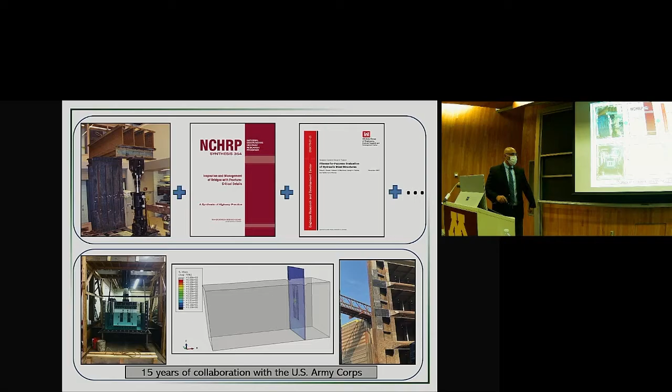Today, I'm not going to talk about fatigue and fracture, because that's one area that I work heavily on, and I've learned from Robert Dexter, but I'm going to talk to you about fire and fire-following earthquakes.

So here's the outline of the presentation. First, we'll talk about some motivations, and then I'll tell you some of the work we've done on system-level analysis and component-level analysis that kind of promoted the performance-based design approach that we looked into. And then how we might take this to a community-level analysis, if we want to look at community-level behavior. We've done it at the community level for wildfire, but the translation to fire following earthquake at the community level is quite clear. Then we'll have maybe some conclusions.

So the motivation is there are a lot of fires that have taken place in the US, and this report was released in 2020 that shows tremendous social losses. Casualties are very high, and a very, very high number of dollar signs on these direct losses. And you can see that the WUI, which is a big deal, and you hear quite a bit about WUI fires or wildfires, is only 19% of that. So fire at the building level is very important. Of course, at the community level it's obviously critical for certain states.

The problem right now is that traditional building standards specify a fire resistance rating. So they say you put insulation on your beams and members, and then maybe that will last for a couple hours, and that allows you enough time to either extinguish the fire or to leave the building. The design provisions, on the other hand, are very simplistic. They improved, but they're very simplistic. They're not intended to be at the system level. It's not a criticism of the current fire provisions, but they're not meant to do that.

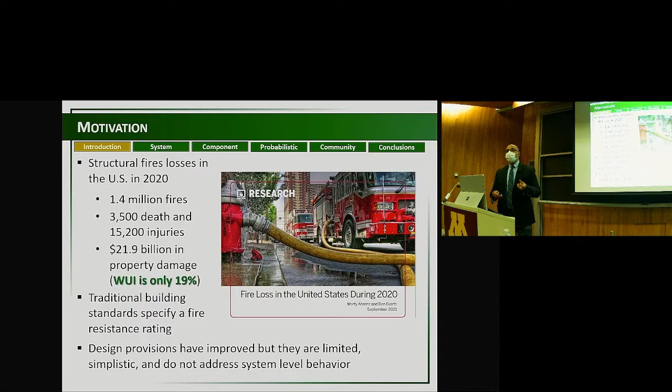So a lot of work needs to be done to understand the behavior of buildings under fire following earthquake. There has been large developments in Europe, but we need to do a lot more in the US.

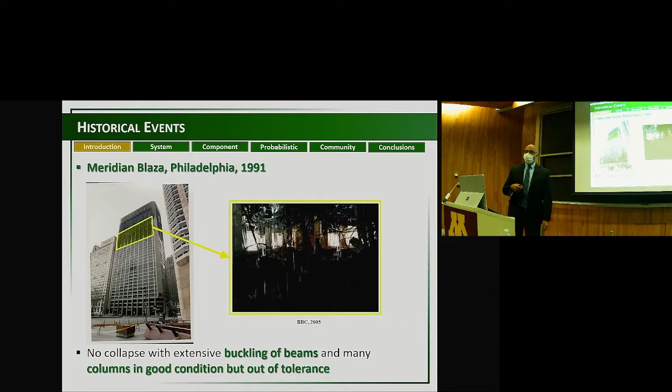If you look now at historical events, you'll see, for example, the Meridian Plaza in 1991. There has been tremendous damage because of a fire that ultimately caused no collapse, but there's large buckling of beams as well as large damage in general, but columns were in good shape. But if you look at cases where collapse did happen, and in this case it's partial collapse, you'll see that there was collapse triggered by buckling of the column, as you might expect. So column behavior is really important.

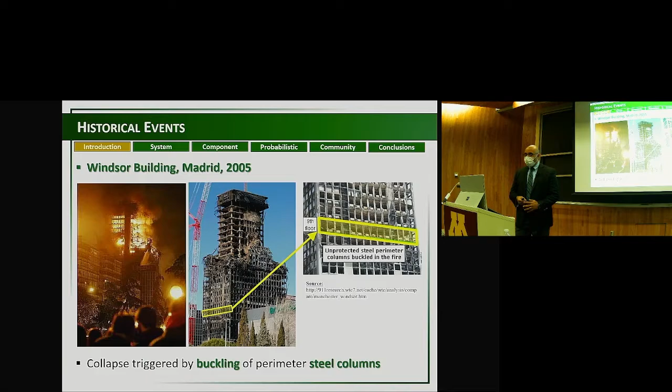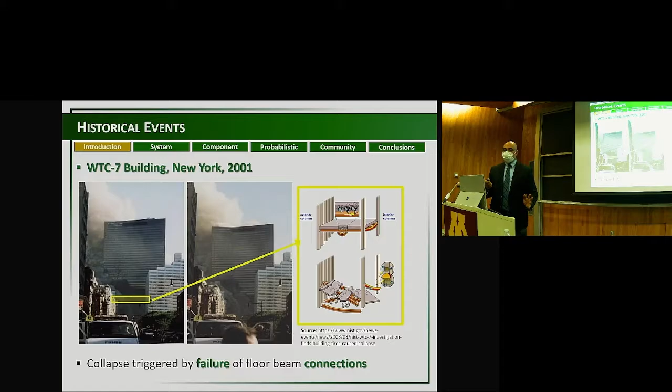That's not to mention connection behavior is not important, because what happened in World Trade Center 7 in 2001 after the terrorist attack is that we ended up losing one of the connections, the effective length of the column increased, and the column became more susceptible to buckling. But there have been some very limited studies that said the performance of buildings, steel buildings, under fire does not have to be as drastic as we might think. We might end up with large losses, but not necessarily collapse. And this test was done in the UK in 1991, I believe.

And you can see from the test there's tremendous catenary actions that allow you to distribute the load and take advantage of that tension.

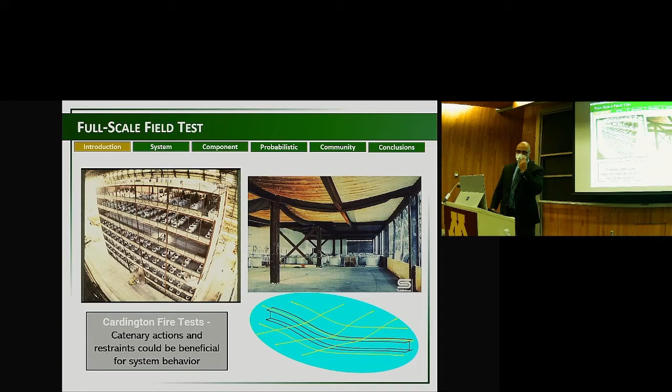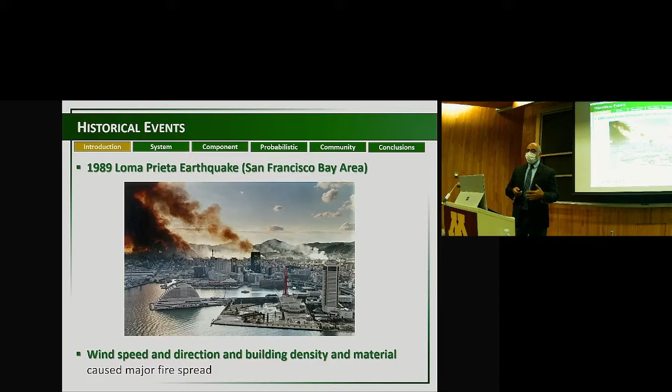And the fire spread because of the wind speed and direction and building density and material and so on. If you look at wildfire, there's very similar characteristics, not necessarily in the initiation of the fire, but in terms of the fire propagation. Fire will jump from one building to another because of the wind and the material and the direction of the wind and the wind speed and so on.

I had a project with NSF to look at the Camp Fire after the 2018 event, and it was just like a war zone. I can't even describe it.

So what is it that we're trying to get out of these sort of models that we want to develop to understand how to handle this problem? This is one way to think about it, not necessarily the only way.

So my way of thinking about it is we need to ask what is the time that we can have to escape. Because if there are people in the building, or even firefighters that go inside a building, it's very important to understand what the safety of the firefighters would look like and how safely can they evacuate people from an actual building.

At the community level, it's very similar because evacuation at the community level becomes very important, and you need to understand how much time you have and what resources can allow you to extinguish the fire and get out of the community as soon as possible. So it's a time-dependent problem.

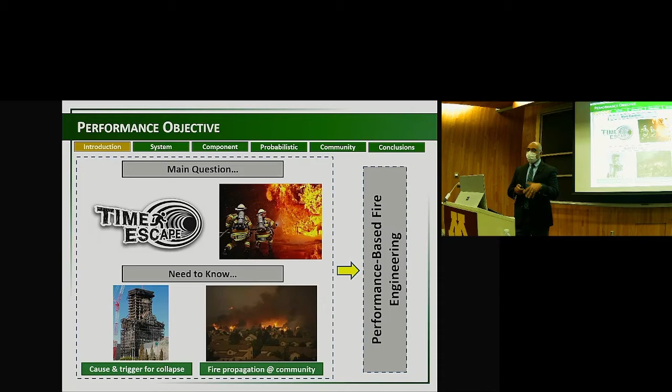It becomes very important to understand the time evolution and how that impacts the building level behavior and the system level behavior. So we started by looking at system level behavior, and I usually get my graduate students warming up

with kind of simple finite element models to allow them to understand the problem, understand the literature better, and get their hands going with some modeling. So we started with simple models of moment frames. These moment frames represent the SAC buildings.

This was a big project that took place in the US after the 1994 Northridge earthquake. And we modeled the buildings with the mass and stiffness and everything else, but instead of using the moment connections that were in the SAC, we used reduced beam section connections by discretizing the element sizes to represent the reduced beam section connection, and we implemented a panel zone model as part of the model.

And we took the modeling level slightly higher by doing a multi-resolution model, where the bottom connection here is a 3D finite element model of that reduced beam section connection, which allows us to reflect on the stress concentration and how the stresses and yielding develop in some of these details. And of course we had panel zone models also for beam column connections at different locations.

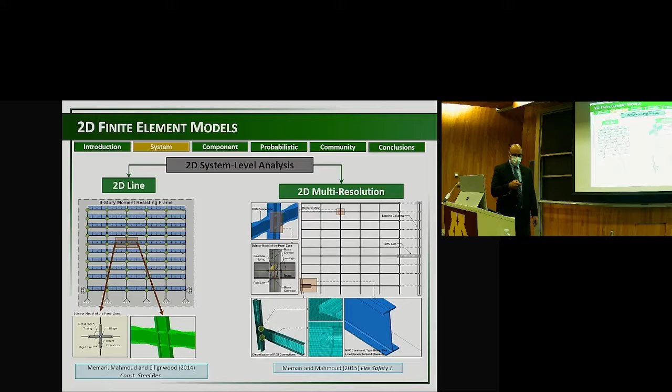We modeled the gravity system using this leaning column with MPC links, for example. I'm not giving you a lot of details because that's not where I want to emphasize the details yet.

You look at different scenarios, different fire scenarios. You could have fire in the first bay or the second bay, in the second story, and so on, with a lot of variations in the fires.

And you incorporate the proper material properties and material definitions, and you insert your time-temperature curve either as monotonically increasing, which mimics the ISO 834 Eurocode, similar to E119 which is what we have in the US. It's only heating, but that's not realistic, so we also used heating and cooling using the Eurocode parametric fire curve. So you can do a lot of analysis.

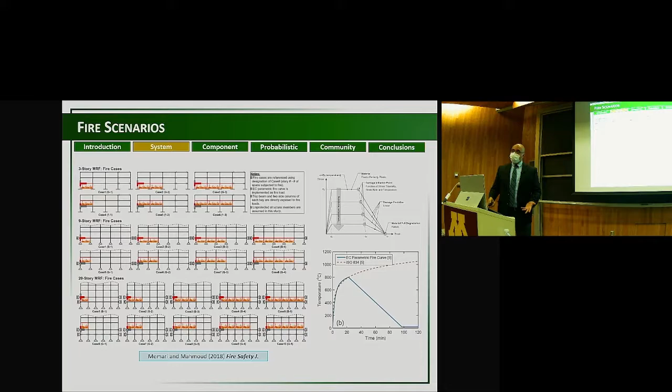And after we do this analysis, we started to look at some of the results. So you can see the results show, for example, when you look at the axial load in some of your columns, you can see what happens with heating and cooling. You can look at the stresses as a function of temperature and how they change with heating and cooling as well.

And you can look at the axial moment interaction, and you can see when you violate the envelope for axial moment interaction for the AISC moment interaction curve.

So you can reflect on the results. With that multi-resolution model, you can also look at the behavior of the connection. You see when yielding happens and where.

But is any of this relevant in terms of system level behavior? Why do I care if the connection yields? Well, of course it has to yield, it's fire. But what is the impact of that on the system behavior?

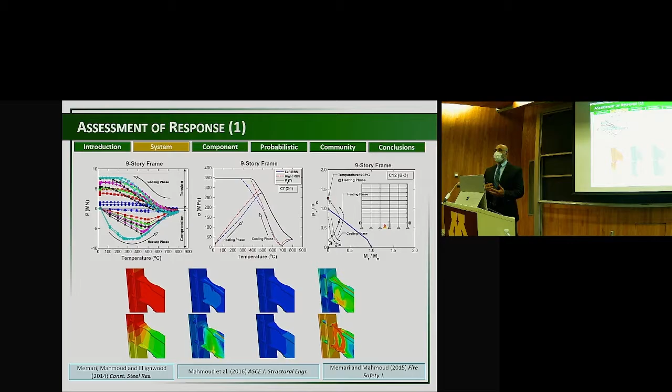So when you look at the global system level behavior, you reflect, for example, on the inter-story drift ratio, which is a very known parameter that we look at when we look at the performance under earthquakes. If you look at these different earthquakes, which we grabbed from the PEER Center in California, scaled properly, and then you run the earthquakes on these models, followed by the fire.

Notice something very interesting with different fire scenarios: fire following the earthquake is not necessarily giving a big impact on the inter-story drift ratio. So it's not necessarily a wrong parameter to look at, but it should probably not be the only parameter to look at.

This suggests that fire following earthquake is not important. Actually, similar results were presented by someone I know a couple months ago, almost identical in terms of their conclusion. But maybe the inter-story drift ratio is not what we should be looking at.

So we said, okay, let's look at something that allows us to understand the behavior, even though it's complex, a little bit more, and somehow put time into it.

The problem with these models is that if they don't converge, you say failure happened. But non-convergence is not just an indication of failure in finite element models. And if they do converge and continue, you think what you're getting in this nonlinear state is quite accurate, which might not be the case either. So you have to be very careful with these models.

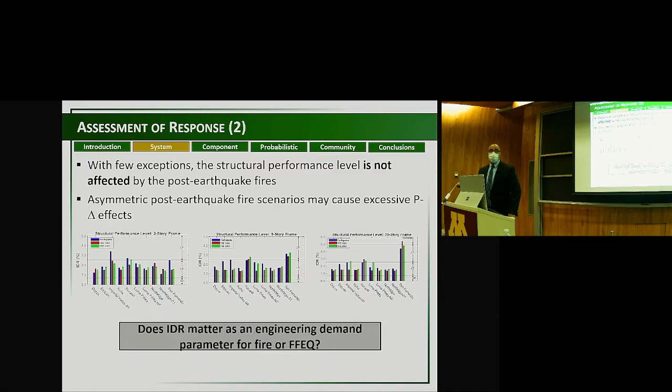So we said, let's take it a notch up. We developed a 3D finite element model, done by my master student, Qin. We looked at different time temperature curves, different cases: heating with no cooling, and then heating and cooling. This particular one has a fire in one bay, because this allows the building to not just collapse ultimately, but also rotate as it collapses.

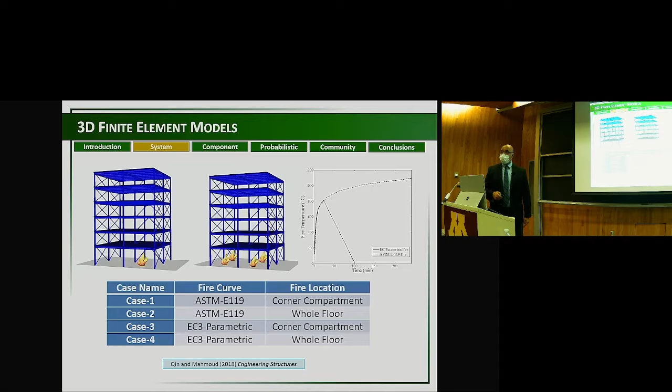So what does that torsion do to the failure of the connections? This, of course, will promote more of a vertical downward failure. There's a lot that goes into modeling this, and it was actually very challenging to get this to work.

But you can look, for example, at modeling the connection. We found some work done by Sarraj that indicated you could represent the shear tab connection with different springs representing the plate bearing, shear, and beam web bearing, and so on. And if you put it all together, while taking the work by Rex and Easterling into account to allow for changes in bearing, bending, and shear stiffness as a function of temperature, then you could model the behavior of this connection without doing a very detailed 3D finite element model.

We did a lot of validation on this that I'm not showing here because of time, but I have slides at the very end in case anyone has questions on validating any of these models.

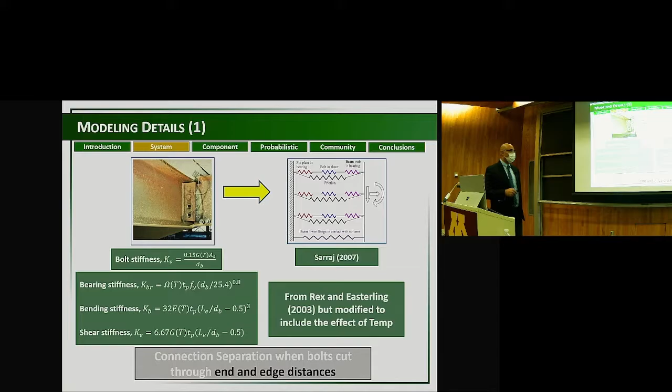For the moment connections, we looked at the stiffness of the connection as a function of temperature, and included that as a moment rotation relationship in our models. We impose 0.06 radian rotation at the onset of failure to model failure, and this threshold value comes from the literature.

And then we, of course, put in the out-of-straightness and other models, contact between elements. We modeled the concrete slab with embedded steel in it, using a damage plasticity model for the concrete, and so on and so forth.

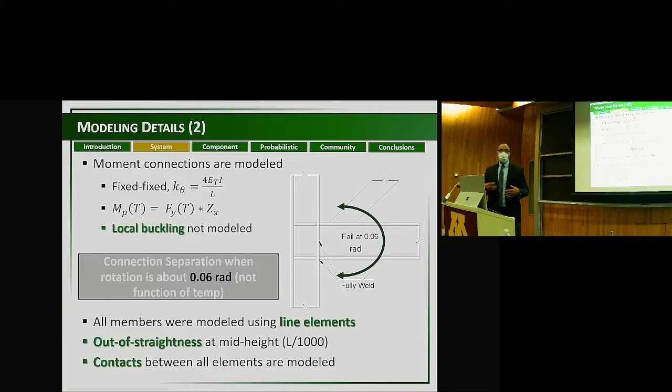Long story short, what you could do with this model is reflect on the behavior of the system as a function of time. We slowed down the simulation so we can see the collapse, and you can see what's failing and what's not failing.

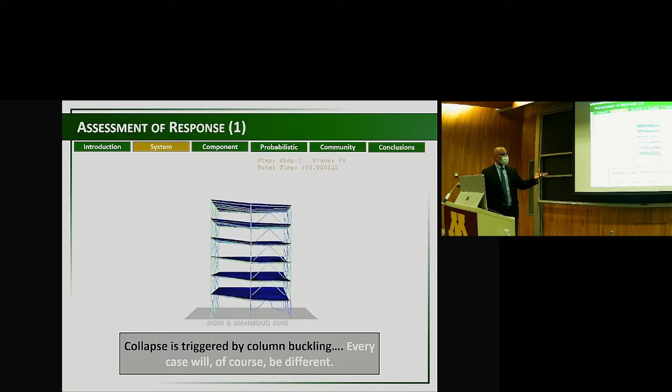You will notice through this failure that separation and failure of elements and connections only happens when you actually collapse the building, because it's coming down vertically. There is no inter-story drift that promotes failure of the connections.

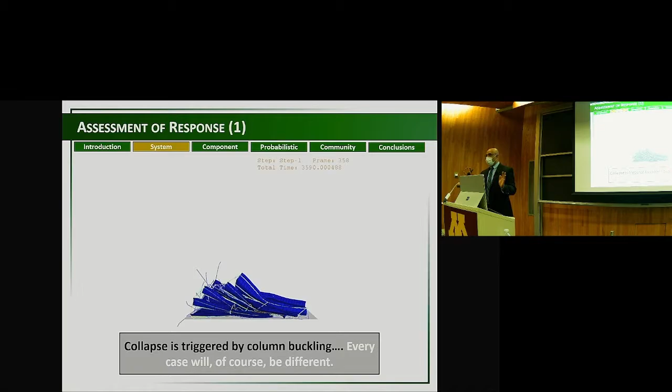There are other scenarios that might promote that. If you have an inter-story drift after an earthquake followed by a fire, that might cause the inter-story drift to increase. I'm not saying inter-story drift is not important, but column buckling we found to be obviously very critical for us to start with.

If you reflect on some of the results here, I'm just showing a snapshot, you can see displacement as a function of temperature for all 9 columns at the first floor. As you increase temperature, collapse starts to happen around 700 degrees. For the different 4 cases, this one comes back because of this rotation and the building comes back. If you look at axial load divided by capacity, you're violating a value of 1 at a temperature less than the temperature at which the building starts to collapse.

At 600 degrees or even more, you start to get a number of columns violating P over PN, which implies that before I collapse, I've already violated the axial load capacity for 1, 2, 3, or 4 columns.

So if I go look at the code, again, the intention of the code is not to inform you on system level behavior. The code tells you here's the capacity of one column. From a system level analysis, I can't do anything with that. So this tells me that it takes multiple columns for the building to start to come down.

This information is very important because a firefighter can go in, and if they understand when the building might collapse or might not collapse, they know how much time they have to evacuate and help people, to rescue people. So it's very critical to do this type of analysis.

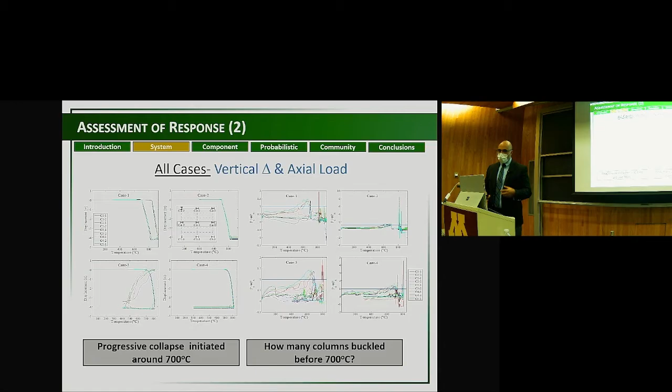We reflected on column behavior even more to try to do some experimental work to get data that we can validate our models with later. We collaborated with the University of Toronto—Oh-Sung Kwon at Toronto, he's actually my very good friend, we did our PhD together at Illinois. We did hybrid simulation under fire and fire following earthquake.

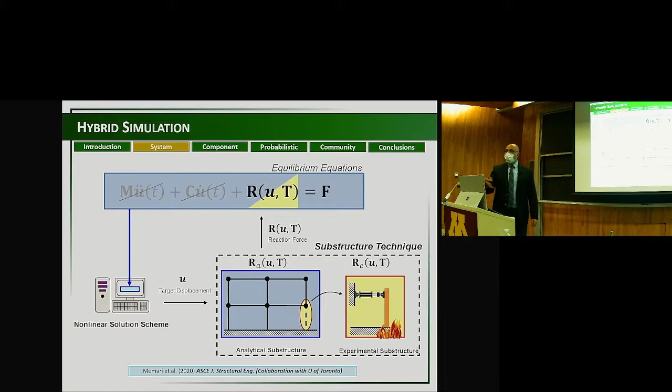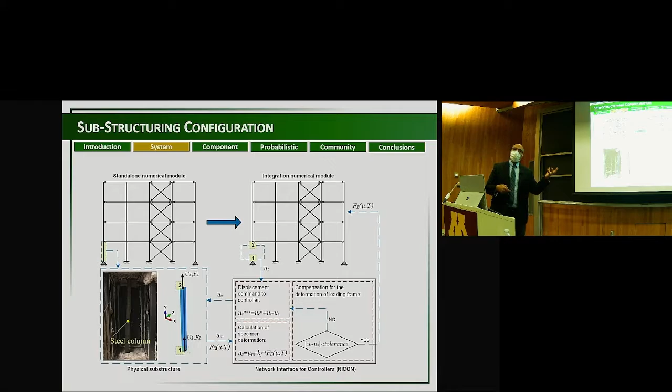If you look at the typical hybrid simulation formulation, you have to get rid of the mass and damping in the formulation. The model we looked at was a small scale braced frame—this is the experimental component, and this is an Abaqus finite element model that we developed. We did all this work at Colorado State using some of the hybrid simulation tools that Oh-Sung developed at Toronto, which is the NICON that he developed for communication, for checking error and tolerances, and for stepping through the equation. Ultimately, we can combine this together in a hybrid simulation to look at the physical behavior of the entire system, but also have experimental results.

We developed this experiment at Colorado State University where we had two actuators applying the load on this column, and around the column are the heat panels. We had 4 radiative thermal heaters making kind of like a square, with the column right inside, and we had thermocouples. We had a PID controller to generate the predefined time-temperature curve, and we had only in-plane buckling of the column.

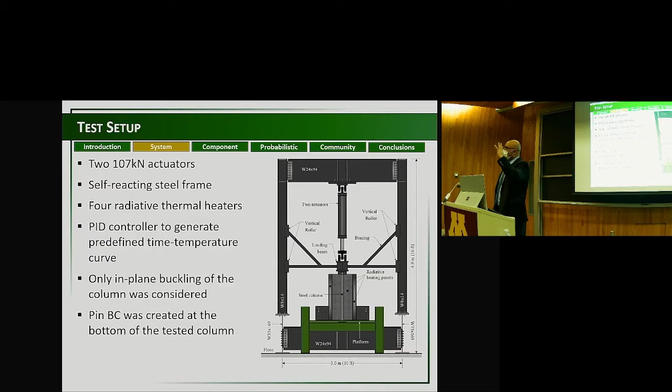We used a brace system guided by these 2 columns to prevent out-of-plane buckling of the column. We also put a pin connection at the bottom to impose an initial inter-story drift from the finite element simulations, allowing us to apply the load not just under a completely vertical column, but also with different levels of inter-story drift. You can see the experimental setup, the pin connection, and some of the thermocouples we installed.

As I mentioned, the NICON was used to record the data received from the controller and step through the time history. If you look at the results for the different tests—again, this is hybrid simulation, not just the experiment by itself—we did different tests with different inter-story drift for the column. You can see how the inter-story drift, as it increases down the table, has a big impact on how the displacement develops over time, and more so on the axial load over time. So column buckling is very critical for us.

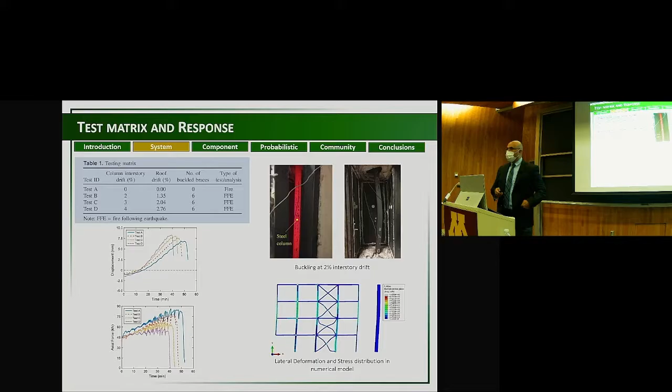How can we take the information we developed from the system level behavior and from the single component level experimental analysis to further reflect on component level behavior for the columns? Because now we feel like we need to do more on this column analysis if we want to develop a performance-based design framework. So we decided to develop a flexibility-based model to understand the impact of fire and fire following earthquake on columns.

You could do that with finite element analysis. You can build an Abaqus model that allows you to do that. But if you want to run thousands of simulations for probabilistic analysis, it becomes very difficult. You can write a code that allows Abaqus to talk to something else to update your models and run it, but we chose to develop a flexibility-based model to do that.

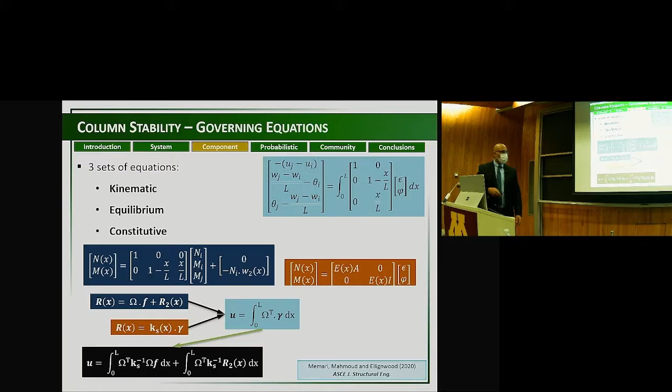This was all done in MATLAB, and again, it was done by my PhD student, Mahmoud. You look at the kinematic equations, equilibrium equation, and constitutive equation described by these three equations, and these are reduced forms that allow you to get the nodal displacements for these columns.

You can take these displacements and relate them with eta, which relates the vector of relative displacement and rotation to the vector of the applied redundant forces. Then you can get your full vector of nodal actions and deformations. And from that, you can easily extract your stiffness and geometric stiffness for the system.

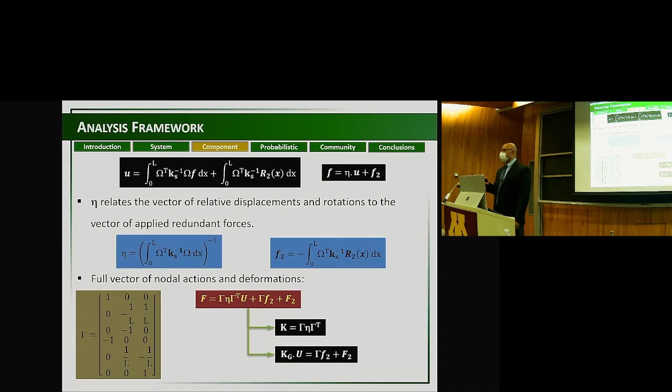These stiffness values are very important for the stability analysis. One of the most important features of this flexibility-based model is our ability now to model the modulus of elasticity for the column using this sort of variability.

So we take the column and discretize it into small little pieces, and these pieces can have different variations of the modulus of elasticity. That imposes the temperature or fire temperature profile of your column. So if your column has a linear profile or a parabolic profile, you can actually impose that on your column with these variations.

You will see a lot of work that has been done on the behavior of beams and columns under uniform temperature, but not under this varying temperature profile. But this is a very quick tool that allowed us to do that.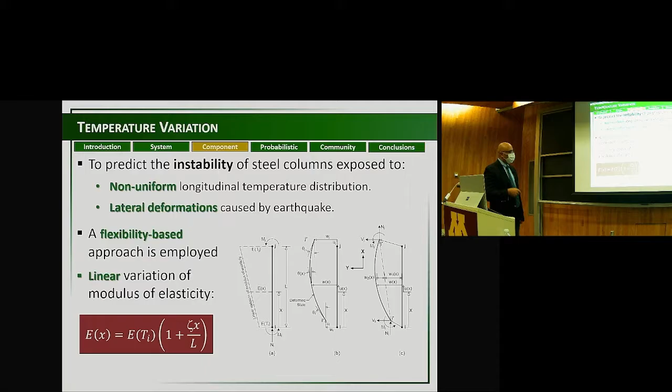Using this tool we developed with different material models - this one we got from the Eurocode, this is Amit Varma and his student at Purdue with Elastic Perfectly Plastic, and our work at Colorado, which is model D that has a trilinear representation of stress versus strain.

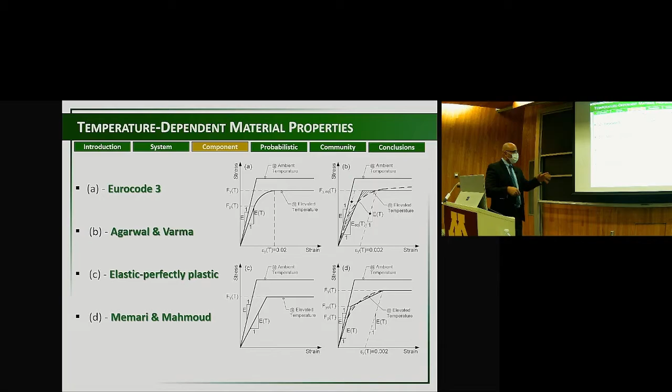We are now able to look at the behavior, but we had to include the P-delta effect because of the curvature or bending you get on the column. We also included residual stresses in our model that come from thermally induced residual stresses from the hot rolling process.

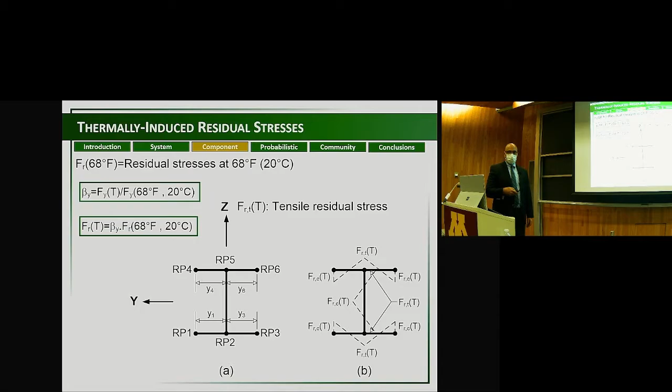You can look at these different profiles for temperature, the cool end versus the hot end, meaning this end is colder than the other. With these different temperature profiles, you have a variation in modulus of elasticity, a variation in yield stress, and a variation in the proportional limit.

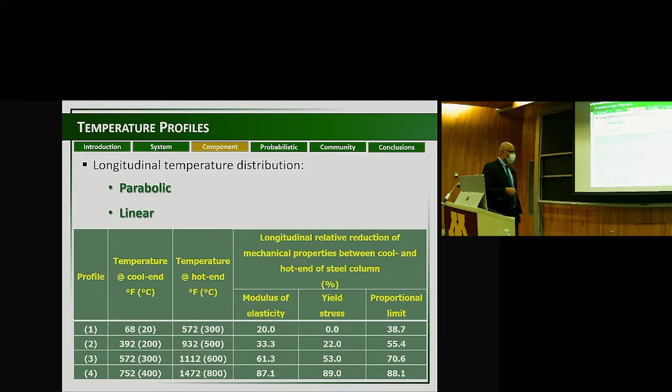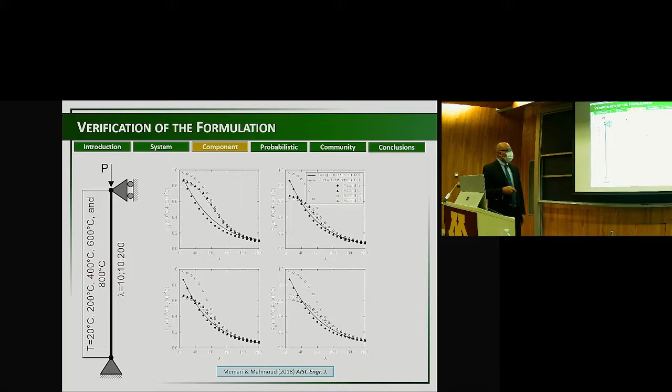This gives us the parabolic versus linear variation in temperature. When we run our model initially with constant temperature, with no temperature variation along the length, and compare what we get versus what everybody else got, you can see that at 200, 400, 600, and 800 degrees, we get very similar results to what Amit developed at Purdue with his finite element model - I believe they used Abaqus. So our flexibility model is giving us very similar results to what you would get out of Abaqus, and that was a very good way of verifying that the model works.

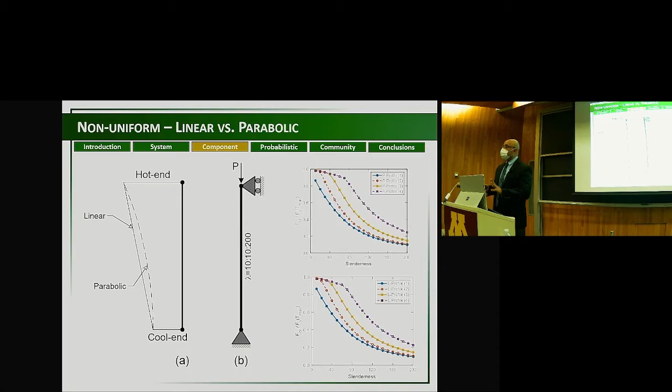Now that I'm able to impose different variable temperature profiles, I can show you how the different profiles end up giving you different critical buckling stress as a function of KL over R, the slenderness ratio for the column. You can see as the temperature profile changes, the critical buckling stress changes accordingly. This becomes important later when we try to couple this flexibility model with the big finite element model.

So we used this flexibility-based model to propose equations for design, because the current AISC equations do not take into account the varying temperature along the length - they only give predictions for uniform temperature. But now, for any temperature profile you want, we can actually get the F critical.

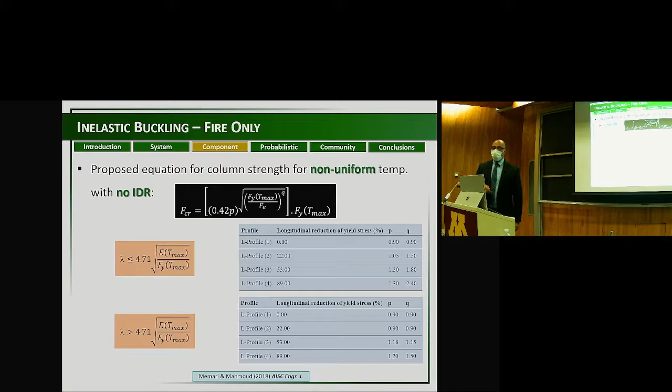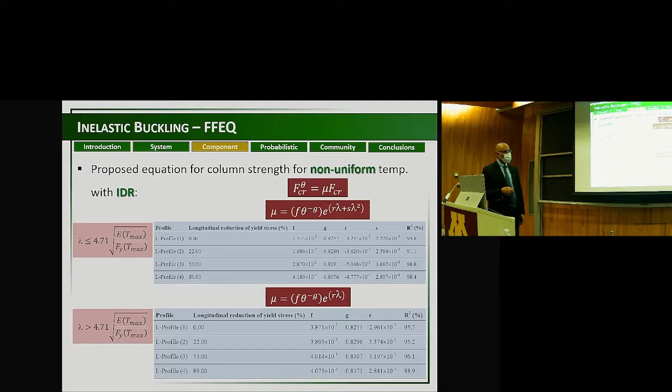Which is the critical buckling stress. Because our model is able to take the inter-story drift as well, we're able to develop an equation that allows us to get F critical as a function of when you have non-uniform temperature and inter-story drift. So we propose these two equations to allow you to understand column buckling under these two different conditions, with and without an inter-story drift in the presence of any temperature profile.

We compare our proposed equations with what we get out of our model, and we get excellent results. Now you can see how F critical is drastically influenced not just by the temperature profile as I showed you, but also by the inter-story drift that you have in the column, which is very important to look at from a component level.

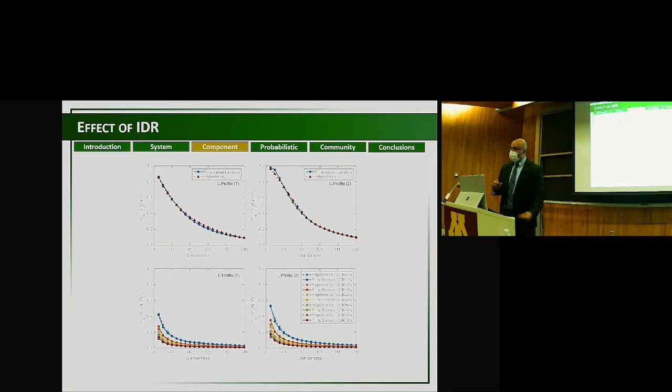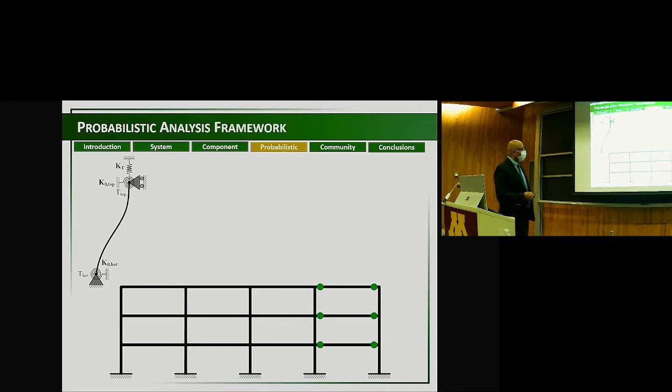From a performance-based design perspective, how can we take the ABAQUS models we developed at the beginning, and the single column model, and put them together? We started by looking at this 3-story steel frame, and said this is the flexibility model, this is the steel model we developed from ABAQUS. Can we develop a performance-based design framework for that?

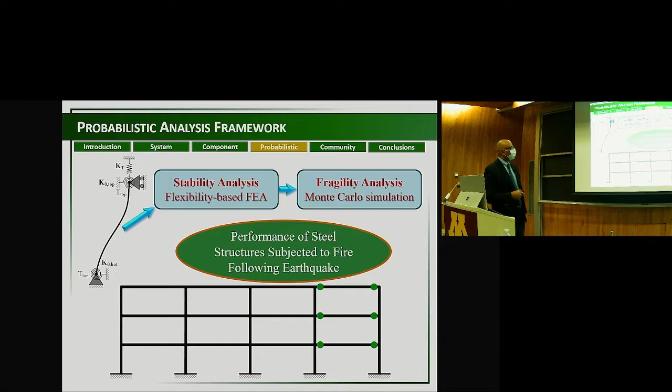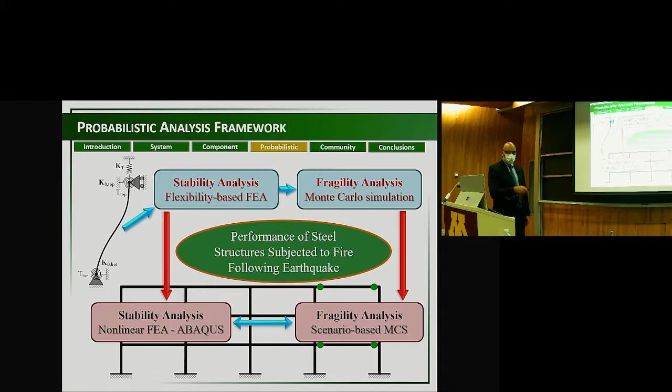Without getting into the massive details of how this sort of communication and loop worked, I'll show you the main components of this framework. So this is the performance-based design for earthquake that was developed by the PEER Center.

Everybody uses this performance-based design approach. For any performance-based design problem, you have to look at the hazard, the system, the damage, and the losses. For required performance, specifically for fire, insulation, integrity, and stability become important. So our focus was on stability.

This is the model that we developed for performance-based design. One of the most important features, which I'll discuss as we step through it, is the fragility functions giving you the probability of the damage measure for fire following earthquake, giving the engineering parameter under fire—for example, fire load density—and the damage measure in the earthquake, which is interstory drift.

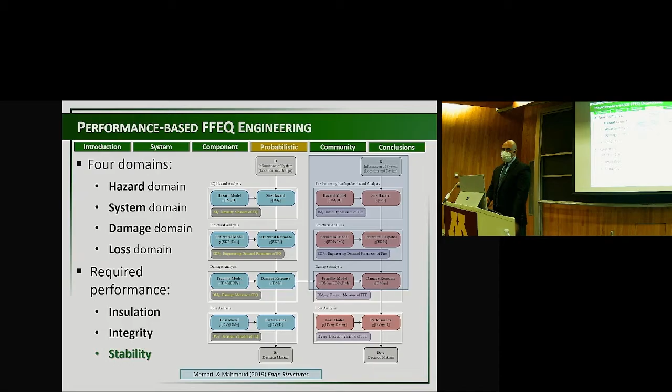So if I know the fire load density and the interstory drift, can I get the probability of damage for fire following earthquake? To do that, we had to do stochastic analysis.

We started by looking at the different random variables corresponding to fire load density, opening factor, thermal absorptivity from the Eurocode, and we get the mean and coefficient of variation, looking at different distributions. This allows you to develop a wide range of time-temperature curves for different fire load densities—this one is for 500, for example, this one is for 1,000.

The other thing that was very important for us to develop is to look at the insulation. So we looked at the thickness, the conductivity, specific heat, and density, and there are various distributions that you can find for these in the literature.

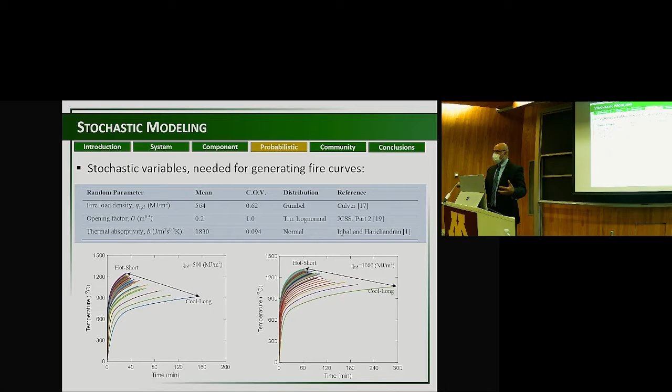Using this finite difference analysis, you can determine the temperature in the steel based on these temperatures, because the temperature in the steel is not the same as the fire time-temperature curve due to the insulation—the temperature in the steel has to be different. This allows us to get the exact temperature in these columns.

We looked at the famous work by Professor Galambos on the combination of mechanical load and fire for fire design as one of our variables, and some of the work Professor Ellingwood did on the combination of dead and live load. We then used some distributions for the load as well.

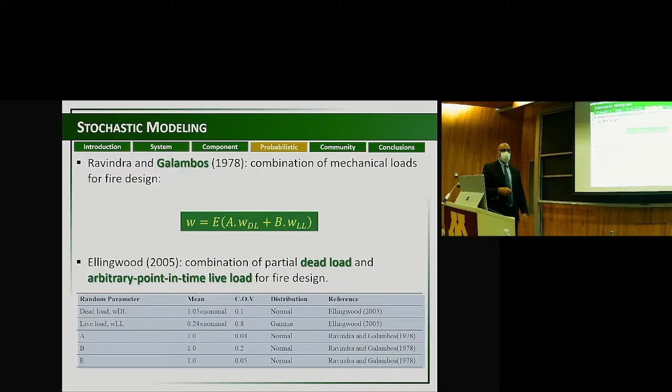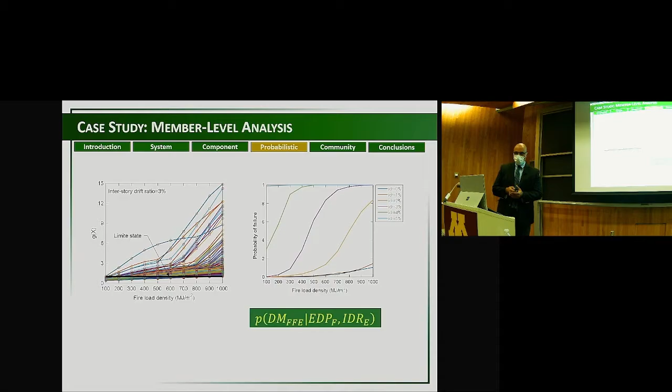So this is essentially what I showed you at the bottom, and I said this is a very important equation because it tells you the probability of damage. How do we put this together with a building-level analysis? Because this is still a single column, it doesn't tell me much—it tells me quite a bit, but it's not enough.

So we looked at the 3-story steel frame. Each column in this steel frame is modeled using our flexibility model with different stiffnesses that vary over time depending on the time-temperature curve we get from this particular analysis. So I ran a heat analysis here.

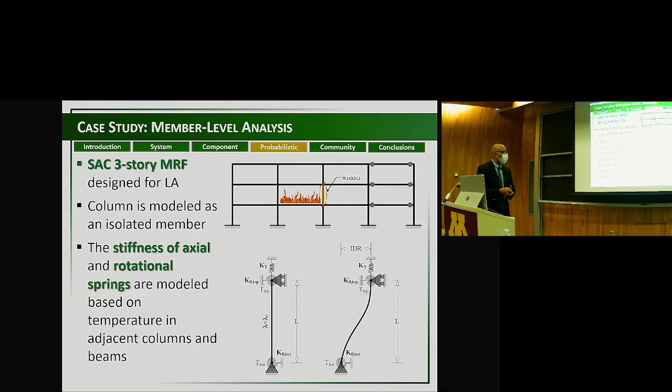That heat analysis is giving me different flexibility or different stiffness values for my column at the ends. And at the same time, I have the temperature profile for each column that I can impose on my columns using my flexibility method. Then I combine them together by first assuming, first I get interstory drift ratio under all earthquakes. So I have 10 earthquakes with 10 correlated sets of interstory drift ratios.

And then I impose different scenarios, not just the variation I showed you at the beginning. We're able to generate 5,000 scenarios of fire. In MATLAB, we randomly generate a combination of zeros and ones that tells me this bay is on fire, this bay is not on fire. Using these values of zeros and ones, I can determine which columns are on fire or not, and take that into my MATLAB code to evaluate the buckling load of this particular column.

And then once you get the probability of failure for every column, using the temperature profile and the flexibility method, you can compare that value to a randomly generated value to determine the probability of failure in each one of your columns. So ultimately what we can get is a probability of exceedance versus fire load density.

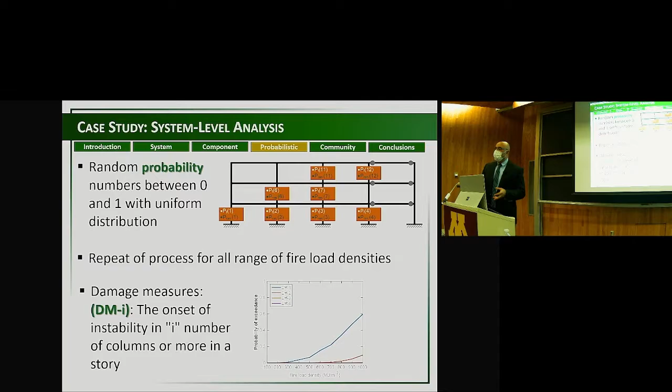So here, the onset of damage or instability in a given number of columns or more in a given story. That in itself is not enough yet, because we haven't closed the loop entirely, but what needs to happen next is that we need to take this particular model that simulates the collapse and understand how long it would take to collapse.

And couple that model with the probabilistic model we developed, target failure probability for fire load, and then go tell firefighters with their thermal cameras, if you reach that value of fire, get out, right? And of course, you have to impose a factor of safety on it.

So this will tell me the number of columns that will impose collapse, and this will tell me the probability of failure of these columns. But I need to take this fire load density and communicate that to the firefighter, and say, when you have that fire load density at different locations, 4 or 3 or 5 columns, then get out. We haven't closed the loop here, but this allows us to communicate that to them as a function of time, when they should leave the building.

Now, how do you take this to a community level analysis? Let me see.

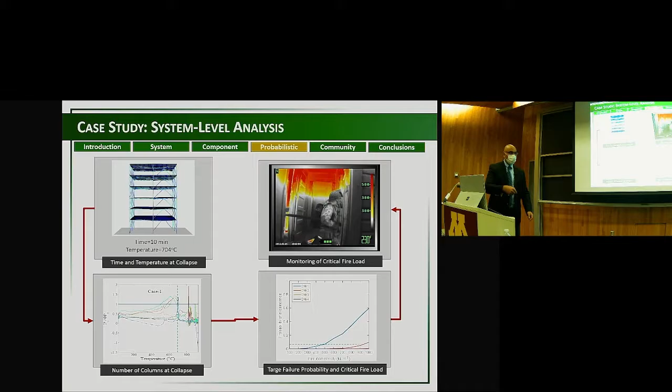Let's freeze a little bit. Okay. Just need to make sure we have time.

Okay, so I'll step through that quickly. For community level, we started by looking at wildfire as a major problem. And like I said, it translates really nicely to fire following earthquake. But I'll focus a little bit on the fire at the community level from a wildfire perspective.

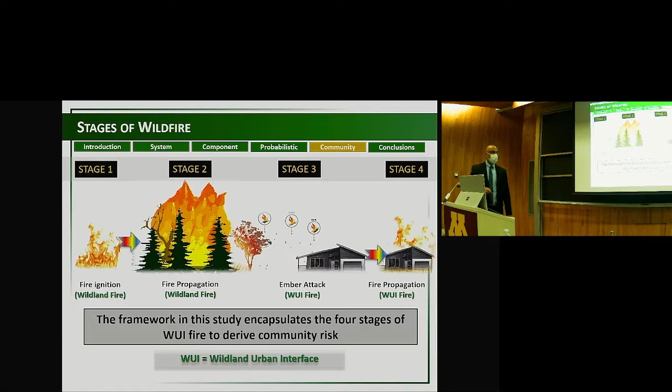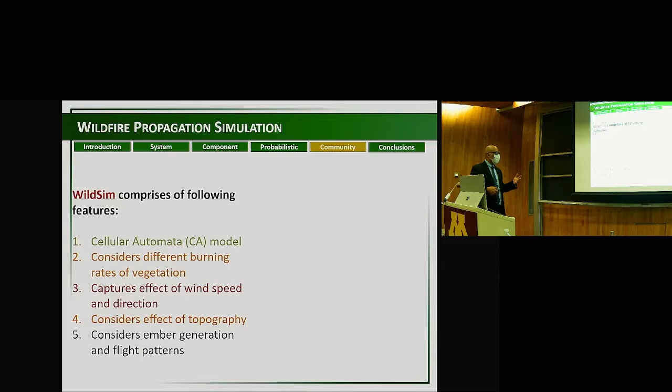The different stages for wildfire, you can go from ignition to propagation to ember attack to propagation at the community level. We started developing a model that allows us to understand fire propagation in the wildland, not in the community. We developed a cellular automata model that considered different burning rates of vegetation, captured the effect of wind speed and direction, considered the effect of topography, and ember generation and flight pattern.

There's a lot to this that I won't talk about because of time, but I'll focus at the community level. I'll tell you why this is important to look at. If you look at this particular model, you can see this is a plan view of the forest, and there's a lake, and we can model fire propagation as it progresses. If I just go back quickly, you can see the spotting that happens because of the ember.

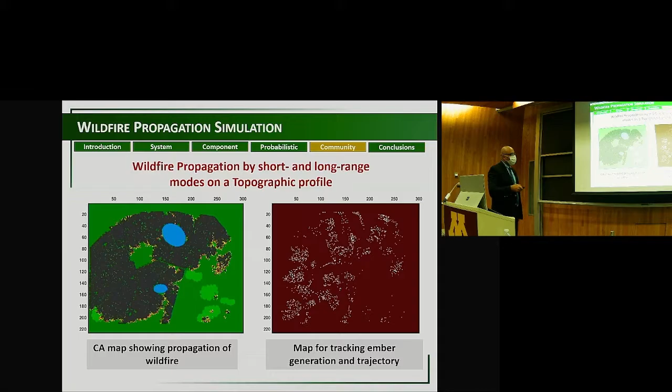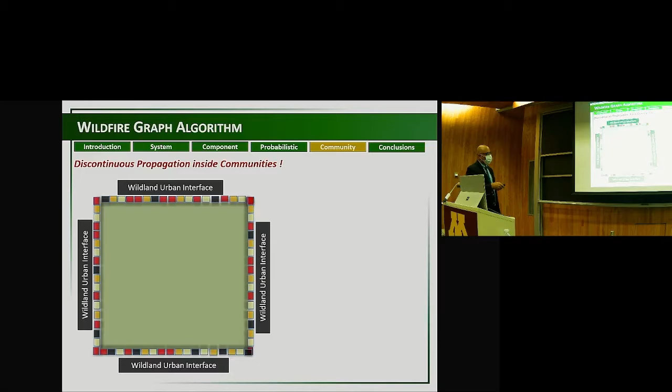So there's an ember model here, and this is a variation of wind direction and what it does to this ember attack. The importance of this is that it gives us an indication of the fire intensity at the community level. So now imagine I have a community with different fire intensity that comes from my wildfire model.

And this different fire intensity at the boundary of the community will obviously have an impact on the initiation of the fire. So look at, for example, your objects in the community. You can think of these nodes here as boundary nodes, and these boundary nodes will have a probability of being ignited for a given fire level intensity that comes from this boundary, the boundary with the forest.

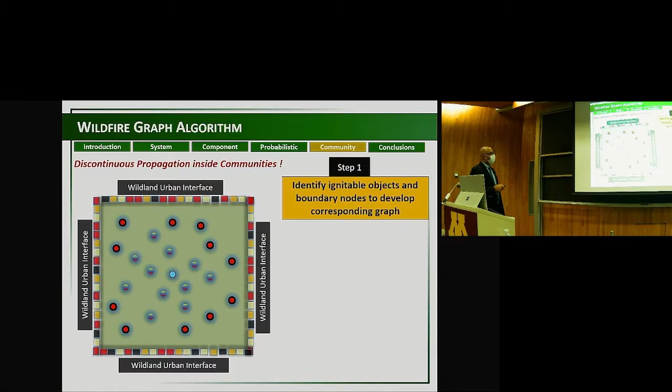If I was interested in this blue node, this node is essentially the structure I'm worried about, hypothetically. The fire has different ways to get to this particular node. So you have to calculate weights for each edge going from your boundary nodes to this middle node, and these weights depend on physics-based fire propagation models. Then identify the most probable path, because not all these paths are probable, and calculate the probability of ignition for that path.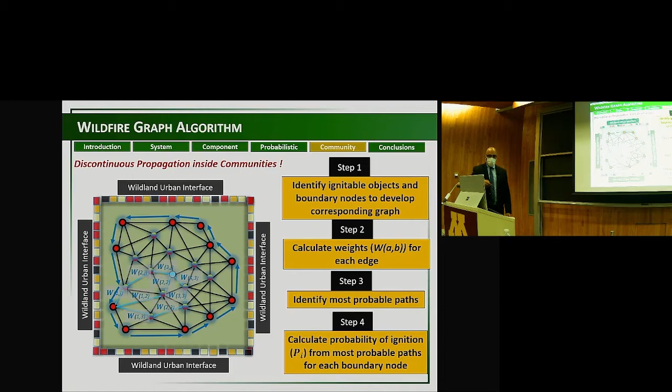There's more to this that I can describe here, but we started by looking at Fort Collins. This is actually where I live, and I wanted to make sure that my house will not get on fire. We developed this graph, but you can see how much more complicated that graph is for actual buildings. This is a graph model that we developed between only three buildings. It's a very complicated model.

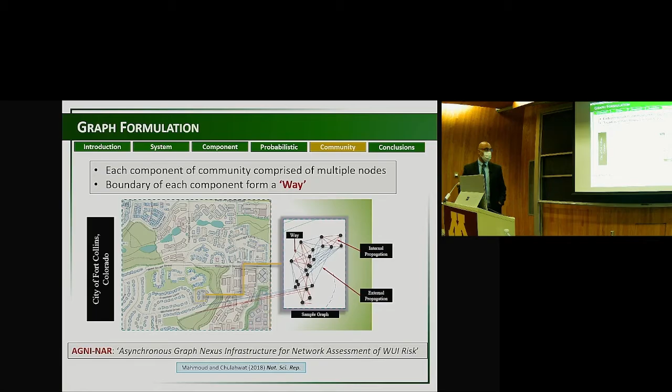We call this model AGNI-NAR, Asynchronous Graph Nexus Infrastructure for Network Assessment of WUI Risk. The reason why we called it this is because AGNI, my student Akshat told me, means fire in an Indian language. And NAR in Arabic, where I'm originally from, means fire. So fire, that's the name of the model.

So we started by looking at classifying objects at the community level: buildings, roads, and so on, and grassland. Then the ignition probability between two nodes will have to be defined by the minimum of the total probabilities. It could be radiation from one building to another, it could be ember, or it could be conduction. But conduction within a given building, we assume that once the building is on fire, it's gone.

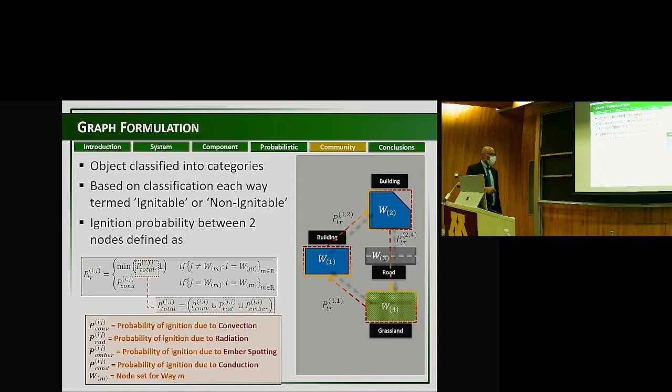So there's no conduction, that's why this is taken out. But these are the different probabilities: radiation, ember, convection driven by wind, and so on. I'm not going to list the equations because they're very long and extensive, but some of this is based on our development and some of it comes from the literature.

The convection model is a function of the distance between the nodes, the effect of wind, flame heights, and flame angles. The ember model is a function of access probability—if you can see the building or not, if the ember is flying, can it hit the building, or is it obstructed by something—the effect of wind direction, as well as the ember distribution. The ember distribution is a function of volume of node, what you're burning, how big that volume is, distance between nodes, and wind velocity.

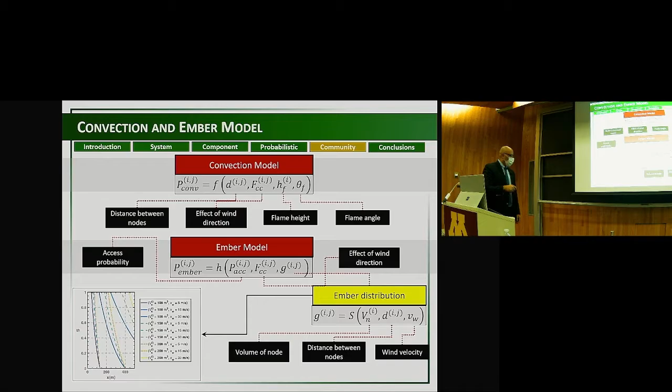You can describe that ember distribution with this figure here, which comes from the literature. Our radiation model that we developed uses the Stefan-Boltzmann law, which is well known for radiation. But instead of just looking at surfaces not related to buildings, we took that function of area, view factor, emissivity, and temperature, and applied it to two neighboring buildings.

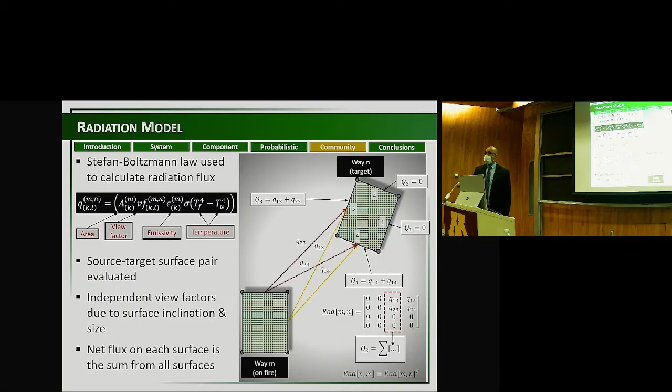So now you can develop independent view factors due to surface inclination, and ultimately get the net heat flux on each surface, which is the sum from all surfaces. I can ultimately get the net on each one of these surfaces and develop a radiation matrix from one building to another. If I take the transpose of that, I actually get the impact of this building on that building in terms of radiation. This was pretty cool—it allows us to do radiation at the community level.

When we apply this to a community, we can calculate the probability based on all these probabilities we have, and based on the most probable path I mentioned, we can calculate the vulnerability from all sources. We can calculate the total community vulnerability value for the entire community, communicated as an average probability or average vulnerability for the whole community.

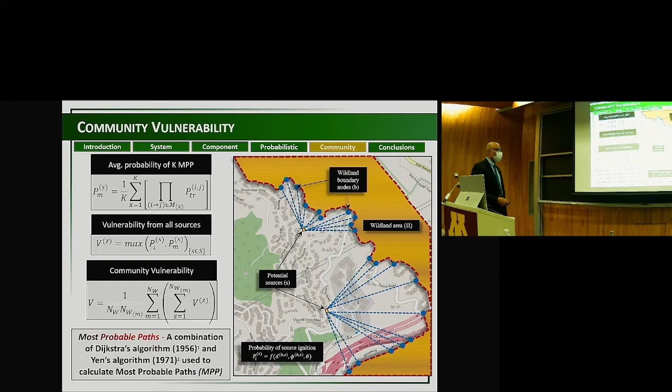You can then start to look at communities and evaluate what the vulnerability is for them. So this is Oakland, California—it was struck by a wildfire in 1991. We can look at the origin versus destination and determine the most probable path that the fire would take to burn the structure. So very important information. We can also calculate the vulnerability for the different parts of the community.

We broke it into region 1 and region 2, and we got really interesting results. The most vulnerable location in our analysis coincided exactly with what firefighters said in their reports, that when these areas ignited, everything went haywire. So this is really cool information for mitigating such large problems, though I'm not showing all of that here.

One of the most important findings, which correlates well with the literature, is that if you look at this map of the community, these small little things here are not buildings, not actual residential homes, just tiny little objects. Using transitivity or clustering coefficient, we find that these small objects, with a mean area of less than 10%, have tremendous contribution in terms of vulnerability. That's why firefighter fire codes tell you to remove anything in your backyard, remove logs, make sure everything is clean. They have tremendous impact.

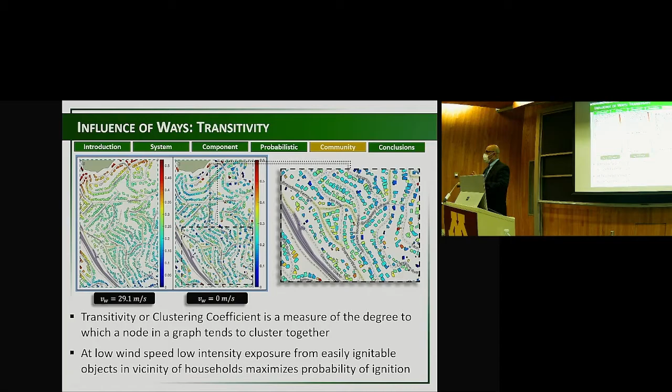At high wind speed, they're not important because ember takes over. At low wind speed, they become very important.

We then took this, and I'm missing a lot of information, but just to give you a general picture: we took ignition maps, the fire danger map, and converted it into a probability of ignition. We take our wildfire work at the forest level and at the community level, then combine them together to get a total risk at any given day.

And remember, that risk is driven by so many things: the community layout, the proximity of the building, all these probabilities for the different fire transmission mechanisms, the wind direction, wind speed at a given day.

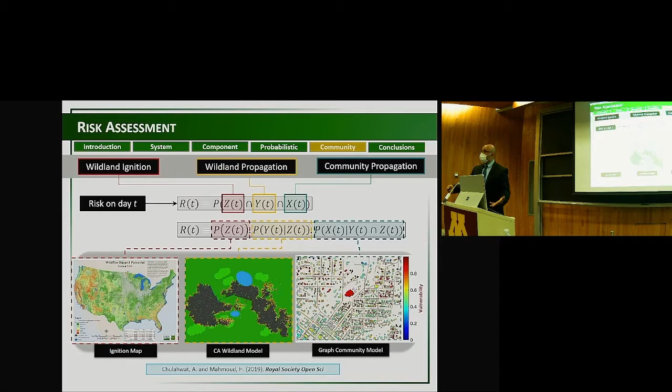This is a small slide, just to help you understand. We have the probability of ignition for years 2007, 12, and 17, for May until September. Then we have the community vulnerability from our model using wind data downloaded from NOAA, and we get vulnerability from May until September for every single day of the month. Then you combine them together.

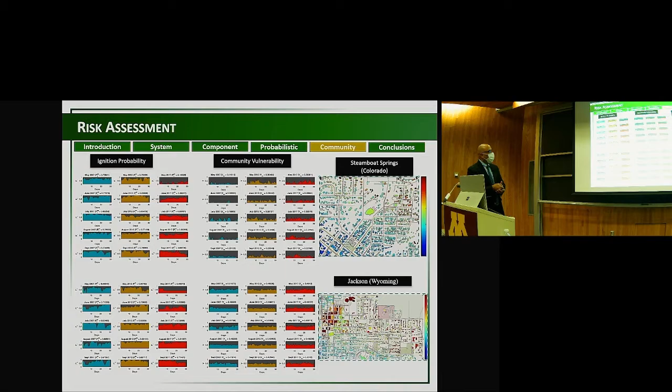We did this for different communities; I'm showing you two examples. Then you combine them together to get the total risk, so firefighters at least have a way of understanding what the risk is at a given day.

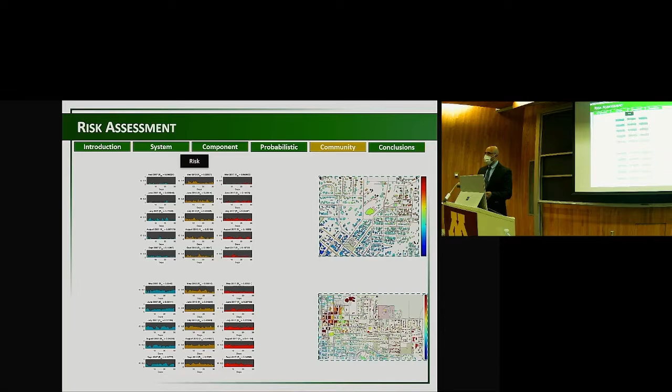So now that you know what the total risk is on a given day, you can take the same model, which I'm not showing you how we did because that's another animal in its own. We took this fire model we developed and turned it into a fire propagation model.

We're getting beautiful results matching the Camp Fire of 2018 in terms of the propagation pattern and the time it took for the fire to propagate from where it ignited, because we have that information, until it reached the end of the community. This is tremendous information, because now you can think about how to develop mitigation strategies to evacuate, to slow down the fire, and so on.

So this is work we're wrapping up. We're submitting a paper on that very soon.

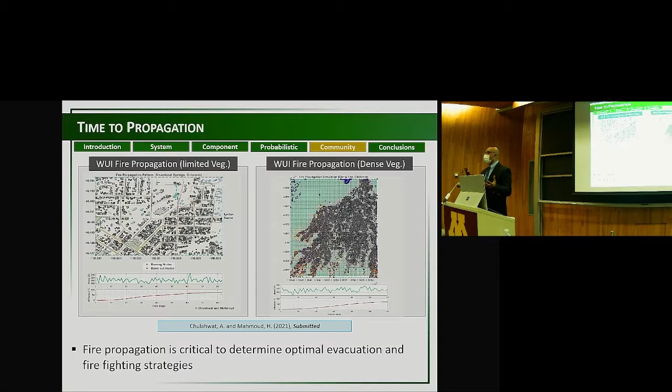At the end, I just want to tell you that our work on fire and fire-following earthquake, at the building level and at the community level represented by the wildfire, is intended to give us behavior in a good, reasonable, approximated way, and allow us to understand the time it would take to evacuate the building or the community.